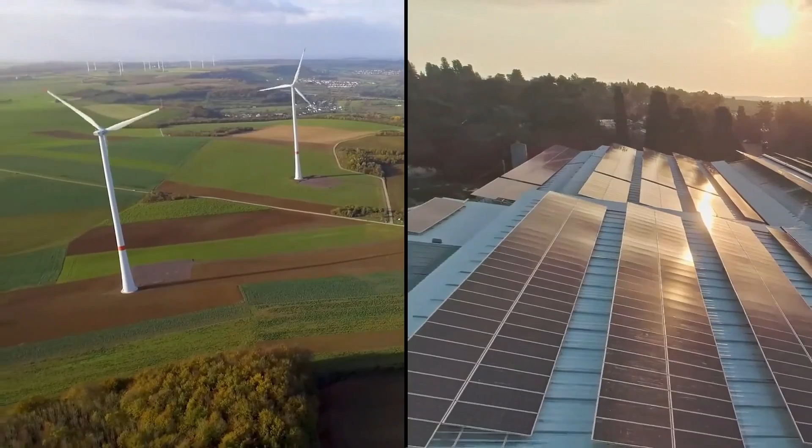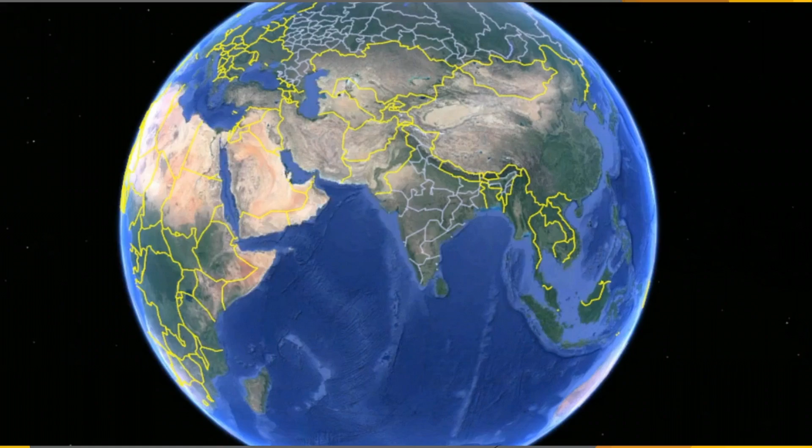Our basic goals are to achieve universal access to modern energy, increase the global percentage of renewable energy, double the improvement in energy efficiency, promote access to research, technology, and investment in clean energy, and expand and upgrade energy services for developing countries. Now we present our thoughts on achieving this goal in the district of Sundargarh.

Wind energy is one of the most sustainable sources of energy. It is renewable, affordable, and clean. Wind energy can be used to generate electricity using various types of wind turbines.

Conventional wind turbines have a high cost of maintenance and cause a lot of noise. To counteract these disadvantages, advanced wind turbines can be used, such as vortex bladeless wind turbines and solid state wind energy transformers.

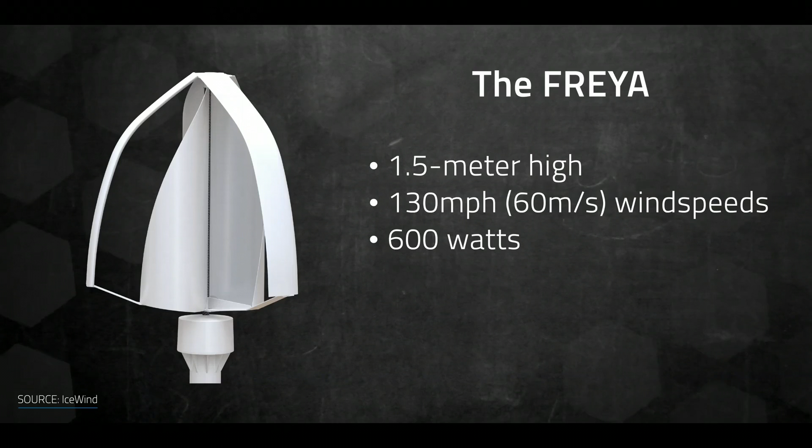For the implementation of these advanced technologies, the government can implement policies like installing and distributing wind generated electricity in areas far away from hydroelectric projects.

As wind energy is a long-term project, the government can introduce subsidies for local people and increase the cost for industries and factories. Another way is that solid state wind energy transformers can be established near residential areas, which can then supply electricity for street lights and traffic signals.

Thus, wind energy is the best source of sustainable energy in the remote and hilly regions of Sundargarh.

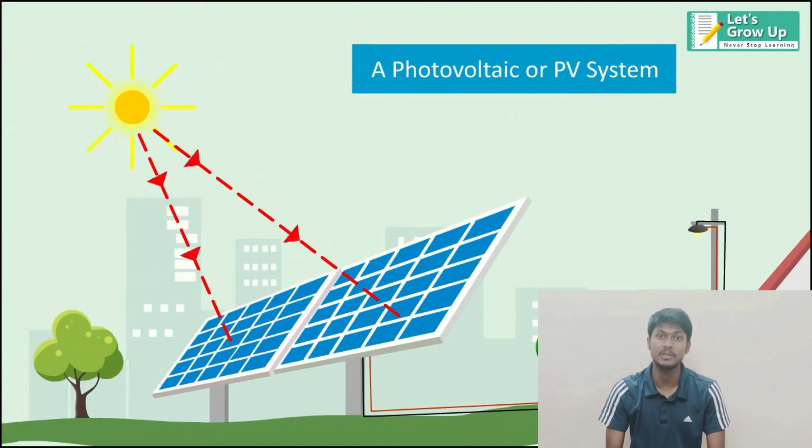Solar energy is one of the best renewable forms of energy, but it has some major advantages and disadvantages. Let's go with the disadvantages first. One, it is very expensive. Second, for setting up a solar power plant, we need a very large area. Third, for maintaining it, we need highly skilled labor, which is also very costly.

Now let's come to the advantages. It is long lasting, you can say, and also pollution free.

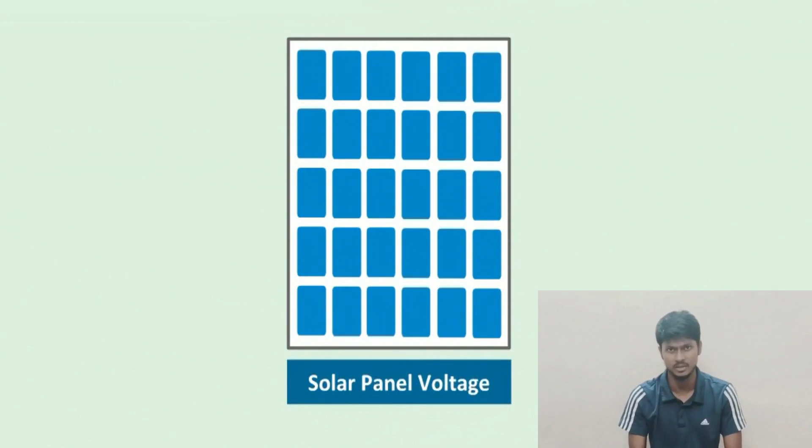So we can develop two kinds of projects, one public and one private, similarly to biomass as I said. For the public one, if the cost is very high, the government can introduce some policy, like collaborating with private companies or firms, where the cost can be shared between the company and government. But no company is going to give it for free.

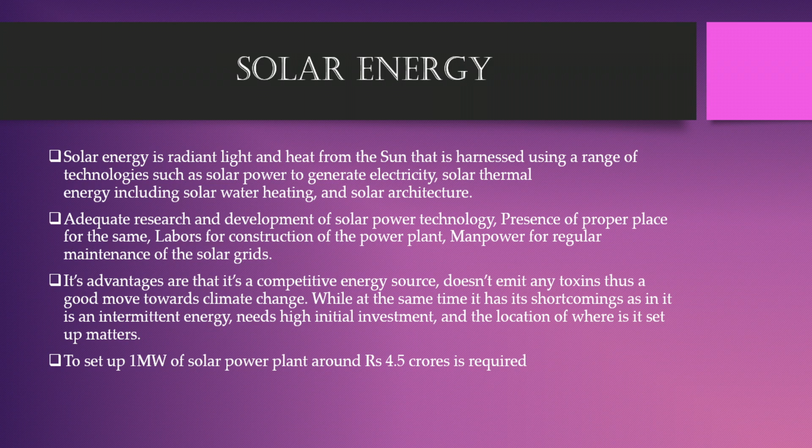So the company should also get some benefit. The benefit is that from the total revenue the government collects after developing a solar power plant, the private company will get a certain part of it and the rest the government can keep.

For the private side, suppose one wants to develop a street light or any home appliance like home lighting using a solar power plant. The government can provide a certain subsidy and the individual can cover the rest of the cost. In this way, a collaboration can be formed—one step government takes and the other step the individual takes—then it can be done very easily.

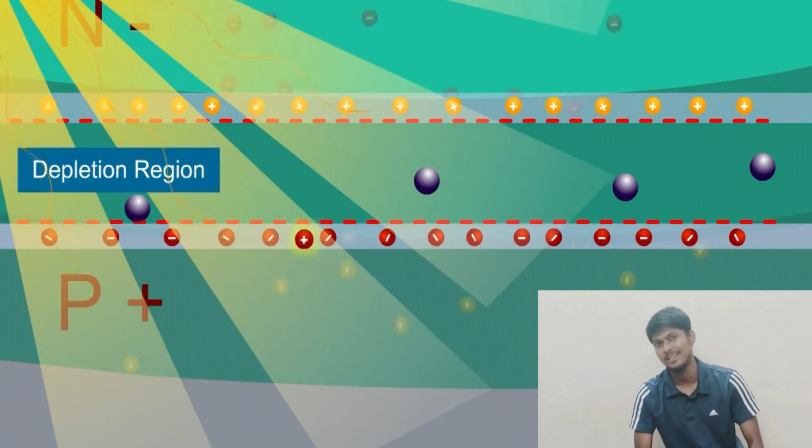Hydroelectricity is one of the oldest known methods of producing electricity by the natural flow of water. Its advantages are that it's a long-term and non-polluting investment, while its disadvantage is that it affects the surrounding natural habitat and water habitat, and also the people who have houses around the place where the dams are to be built.

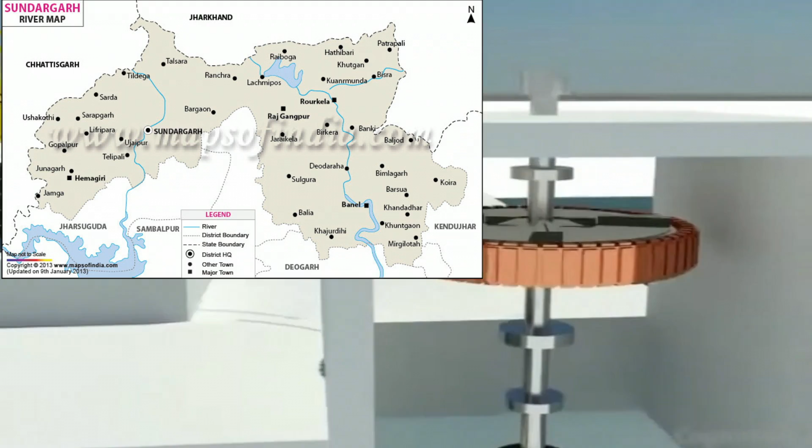Brahmani River, which flows through the district of Sundargarh, is the main source of generating hydroelectricity. Once produced, this electricity needs to be transferred to various sub-districts, wherein storage units have to be set up. Electricity from these grids will be transferred to households and industries, the ratio being between 60 to 70% for households at a subsidized rate, while the rest for industries.

So in sustainable development and growth, we got the topic clean and affordable energy. So we brought one idea, that is biogas. Related to biogas, the major thing required is agricultural waste. We can use manure, or sewage. It can also be used.

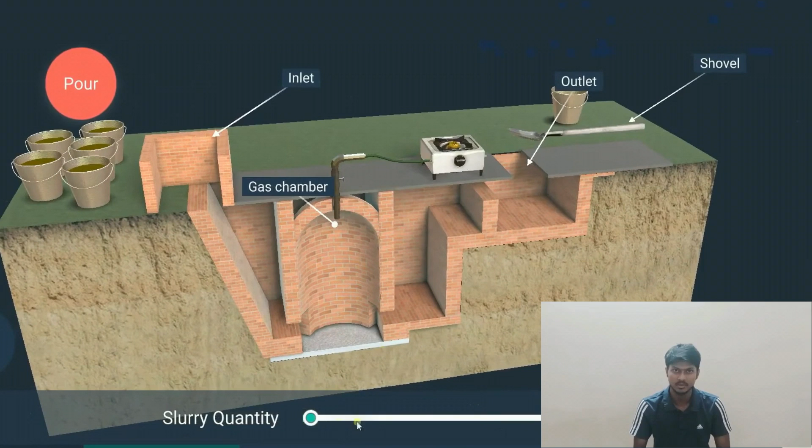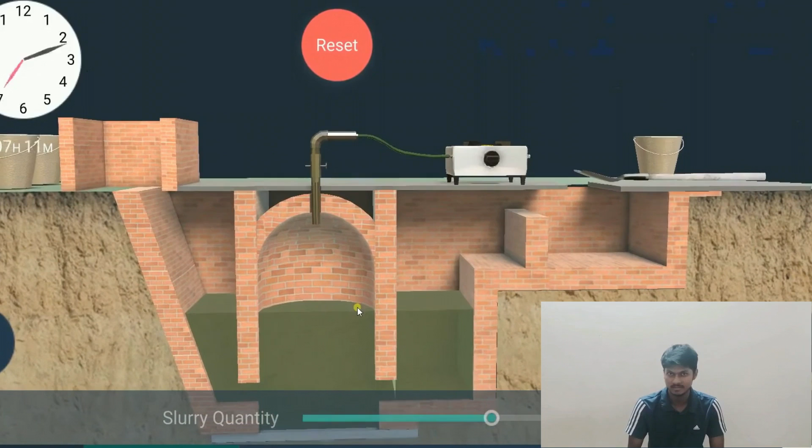We cannot bring a topic all of a sudden. What we need is to first give an idea to village people and city people. For village people, we can conduct meetings with the help of panchayat leaders, and put posters in government bodies and primary schools. Similarly, in the cities, we can put posters in bus stands and government bodies. At least we can get some knowledge of what biogas is and why the government wants to implement this method.

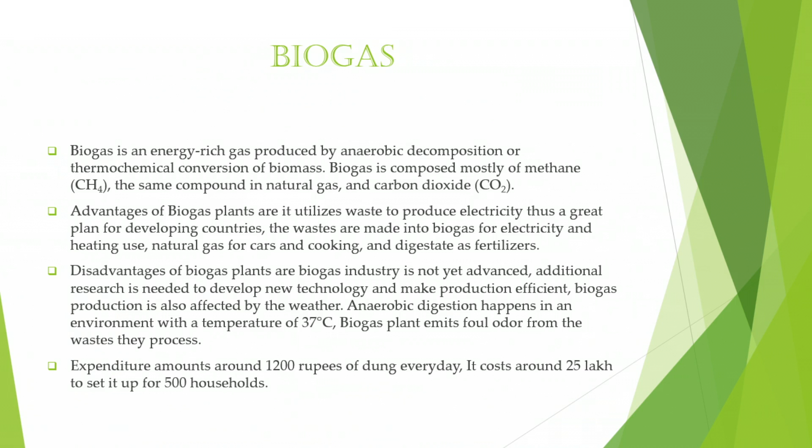Second comes how to implement this idea in actual life. In the cities, for big buildings, we can ask them to collect and separate all waste materials into biodegradable and non-biodegradable, and the biodegradable one along with sewage can be utilized. For village people, we can say collect all your biodegradable and agricultural waste and accumulate it in a place. Then the government can organize a vehicle to carry all the waste, which can then be utilized.

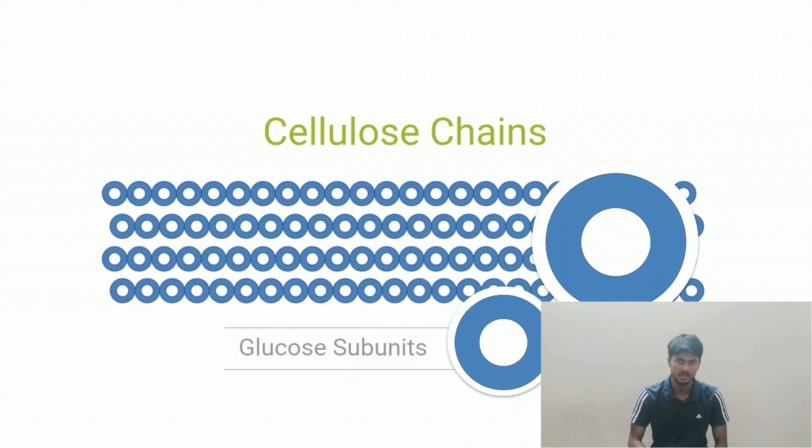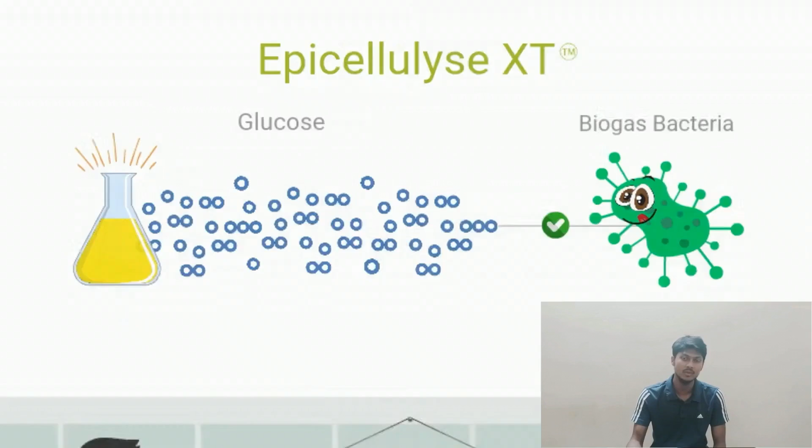Then we can come up with another idea: one will be a public project, another a private project. For the public project, it is all up to the government, which will utilize all the waste material and supply it to people. But the government also has a benefit: it can make a meter system, where up to a certain rate it will provide for free, and if you consume more than that, some rates will be charged. For private ones, the government can implement a policy where 50% of the expenditure the government will provide, and 50% a private person will provide. Then the solution can be done.

So it is a very good form of energy, clean energy and sustainable energy, and I think it will be one of the best methods.

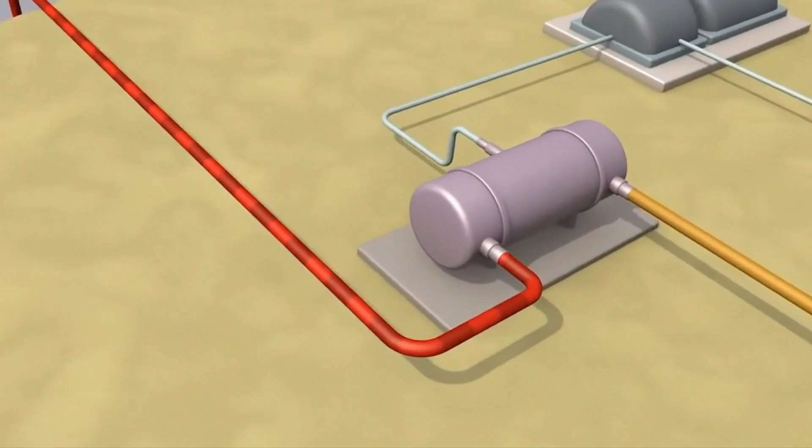Thermal energy refers to heat energy that's converted into electricity. There are several ways we can obtain heat energy, it can be obtained from the sun, by combustion, and many more methods. The traditional approach of obtaining heat energy is a non-renewable approach, the burning or combustion of fossil fuels and coal, which leads to a release of greenhouse gases. This is the main disadvantage, as these greenhouse gases lead to an effect of global warming, which is the rising temperature all over the globe.

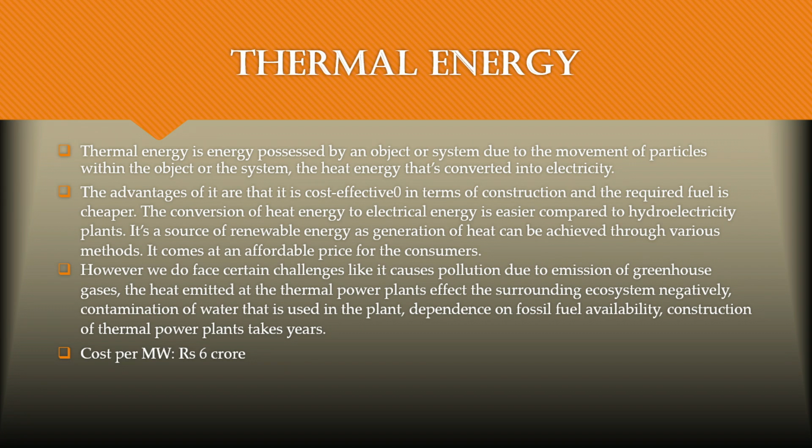The main challenges faced by this traditional method is that it causes pollution, as we mentioned before, due to the emission of greenhouse gases, and the contamination of water that is used in the plant. It is a major challenge faced by us.

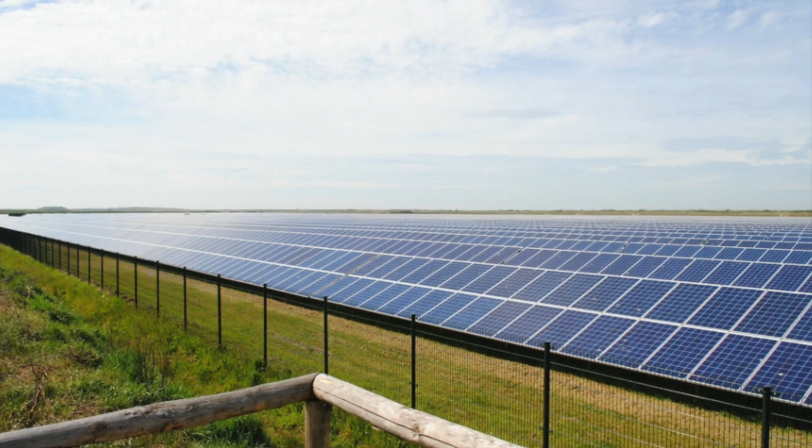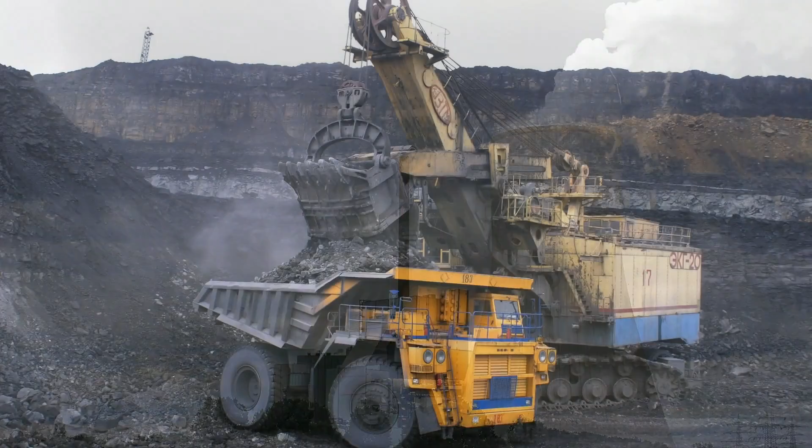Every policy is fruitful only if it is implemented with proper dedication and faith. We cannot change the scenario of the current world in the next 10 years by 2030, but we can ensure that the 50 to 60% of domestic households that depend on kerosene for energy can be converted to using renewable resources for their daily needs. Also, spreading awareness among people about renewable resources of energy over fossil fuels is important for them to accept new electricity or energy sources for their daily livelihood.

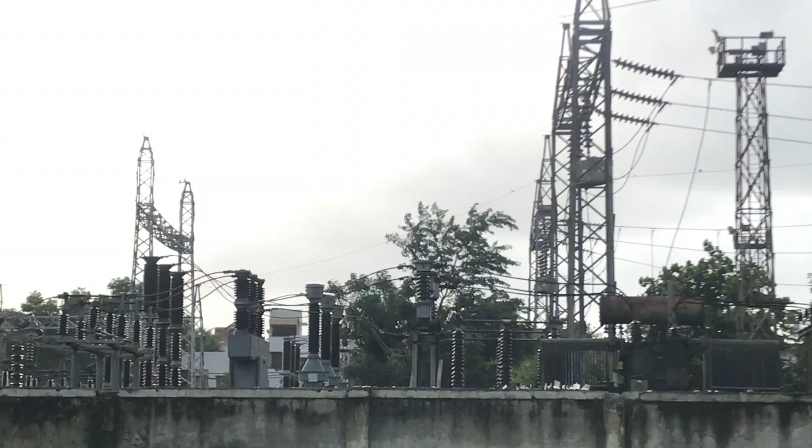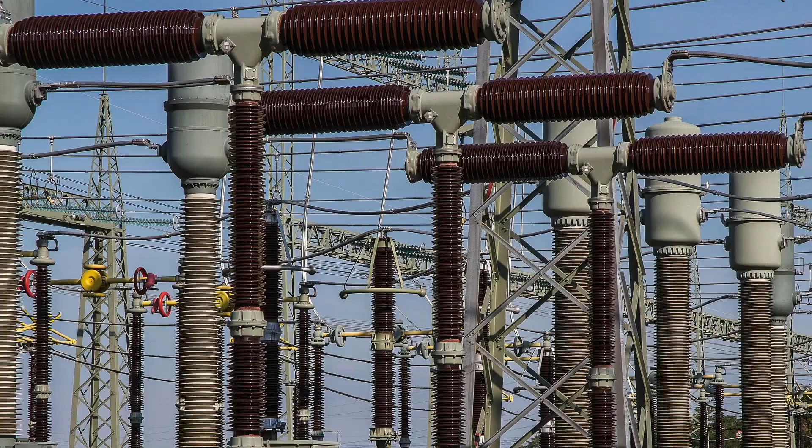That is all from our side to bring about a change and put forth the sustainable development goal.